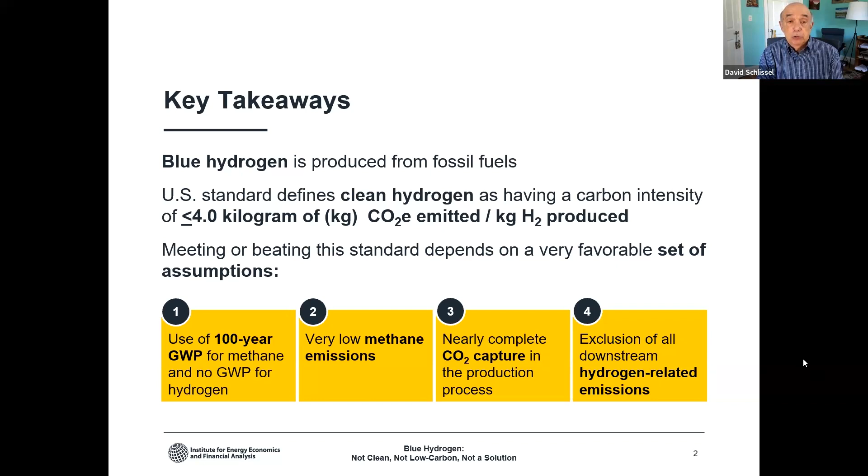With more realistic assumptions, you can see here that the carbon intensity of blue hydrogen will be 3 to 4 times higher than the 4.0 federal clean hydrogen production standard.

Thus, our conclusion is that blue hydrogen is not clean or low carbon and never will be. Next slide, please.

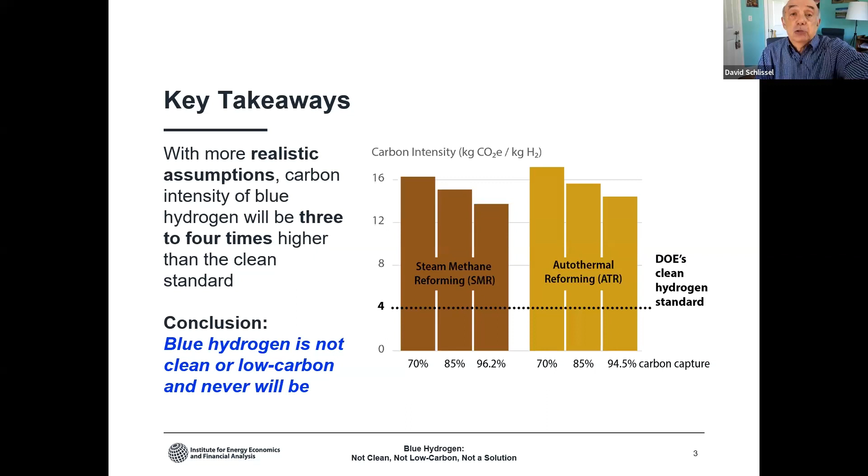Why have we looked at this question? The 2021 bipartisan infrastructure law and the 2022 Inflation Reduction Act have promised billions of dollars, first to establish hydrogen hubs around the nation, second to give production tax credits to both production of hydrogen and to carbon capture and sequestration. We decided it was important to look at whether in fact blue hydrogen is clean, and if it's not, in what circumstances it would not be clean. Next slide, please.

What evidence do blue hydrogen proponents use to prove it would be clean and low carbon? The answer is simple, not much. Mainly, they just repeat the words hydrogen, clean, and/or low carbon together or alone as often as possible, despite lack of evidence, despite whatever questions they're asked. Their response is it's clean, etc.

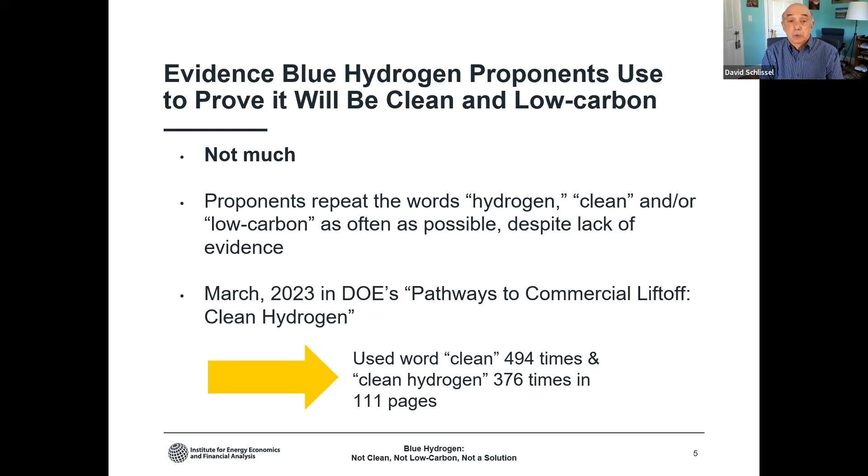For example, the March '23 Department of Energy report, Pathways to Commercial Liftoff: Clean Hydrogen, used the word clean an astounding 494 times in a 111-page document, and used the term clean hydrogen 376 times. To be fair, they did have one chart that showed carbon intensity of blue hydrogen amongst other information about its cost, but they didn't really explain what it meant. Next slide, please.

How have we investigated these claims? We studied the reasonableness of default assumptions built into DOE's GREET model. GREET stands for Greenhouse Gases, Regulated Emissions, and Energy use in Transportation Model. GREET was developed by the DOE's Argonne National Laboratory. It's used all around the world. It was originally designed to examine the emissions associated with clean fuels and has been modified now to look at different pathways to producing hydrogen.

We have no criticisms with the model. We're using it as a tool to evaluate how clean blue hydrogen will be. However, we did find that many of the default assumptions are unrealistic. As a result, we reviewed scientific literature and real-world experience, spoke to some people who designed and work on GREET and others. And finally, we modeled over 100 scenarios in the GREET model to examine when blue hydrogen might be clean and when it would not be. Next slide, please.

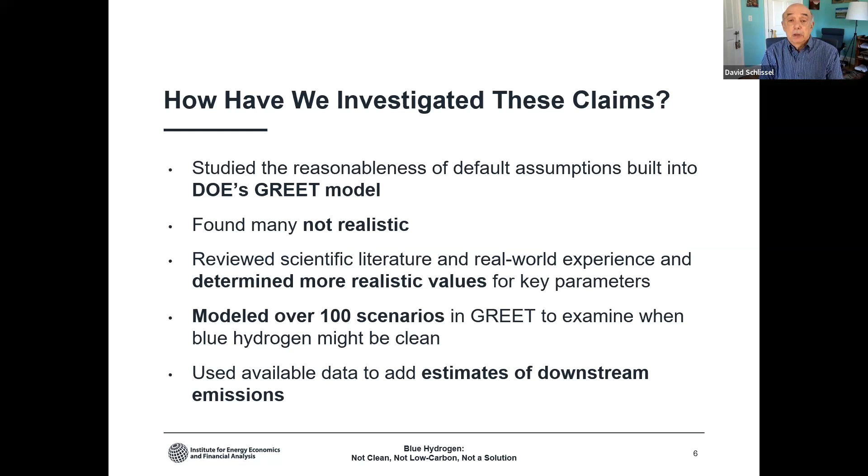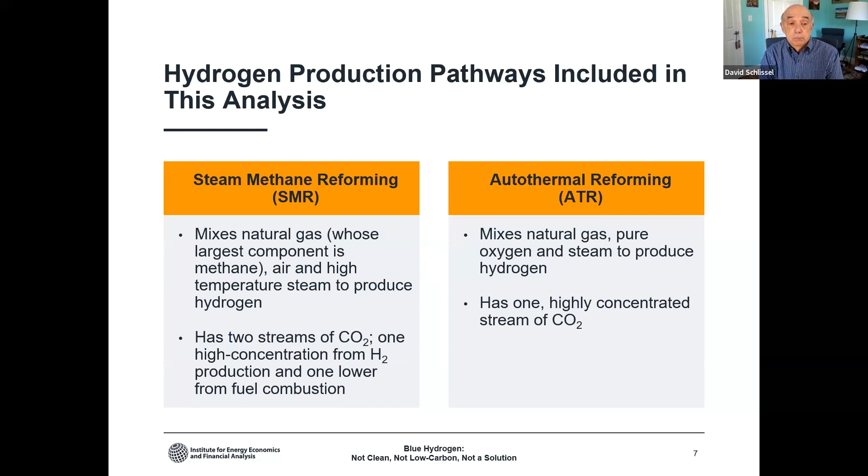We looked at two main production technologies, or as DOE calls it, pathways. The main one used in the world today is steam methane reforming that mixes natural gas, whose largest component is methane, air, and high temperature steam to produce hydrogen. And a newer technology that is expected to be the main one used in the future is autothermal reforming, ATR, which mixes natural gas, pure oxygen, and steam to produce hydrogen. There are a couple of other technologies, but from the literature research we've seen, these probably will be the main ones used in the future. Next slide, please.

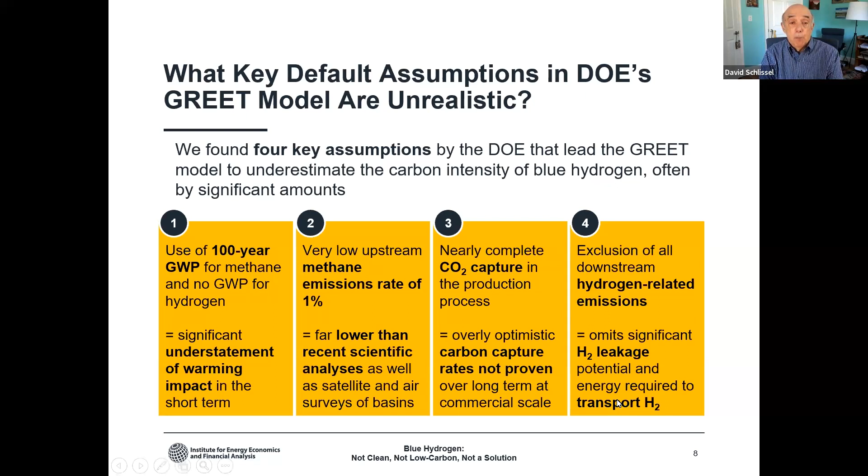As I mentioned earlier, there are 4 key assumptions that we believe lead the GREET model to underestimate the carbon intensity of blue hydrogen, often by significant amounts: global warming potential, methane's emission rate, CO2 capture rate, and whether downstream hydrogen-related emissions are included or not. Next slide, please. The first assumption we'll discuss is global warming potential. Next slide, please.

There are 2 reasons why GWPs matter and why 20-year GWPs matter in particular. As you can see from this chart, methane has a very high 20-year global warming potential of 83 that declines over time to a figure of 30. What the 83 and 30 stand for is times; for example, methane's 20-year global warming potential is 83 times stronger than that of carbon dioxide. Hydrogen has a 20-year global warming potential of 33 times that of carbon dioxide. That declines to 11 after 100 years.

If you only focus on the 100-year global warming potentials, the impacts of methane and hydrogen are significantly smaller, and that leads to an undercounting of their impact on global warming in the short term. Now, using 100-year global warming potentials might have mattered decades ago, when it seemed like the climate crisis was something in the future, decades down the road.

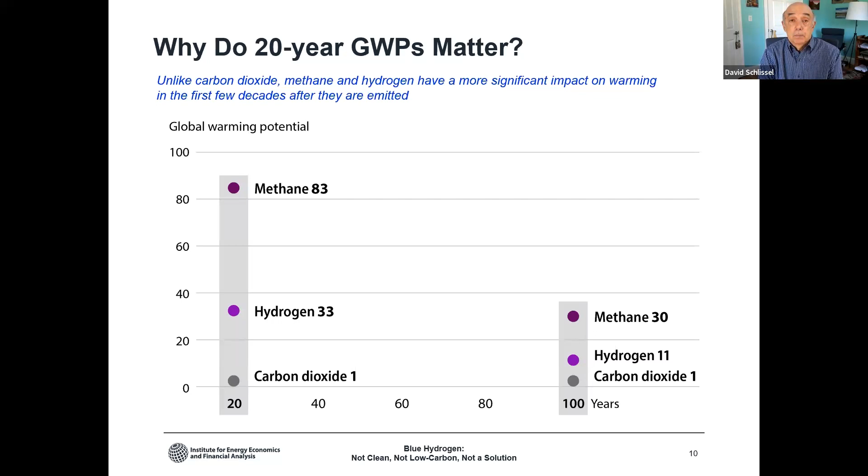The impact of changing the global warming potential from the 100-year default in GREET to 20-year default simply makes the carbon intensity of blue hydrogen higher, whichever of the two main technologies you look at.

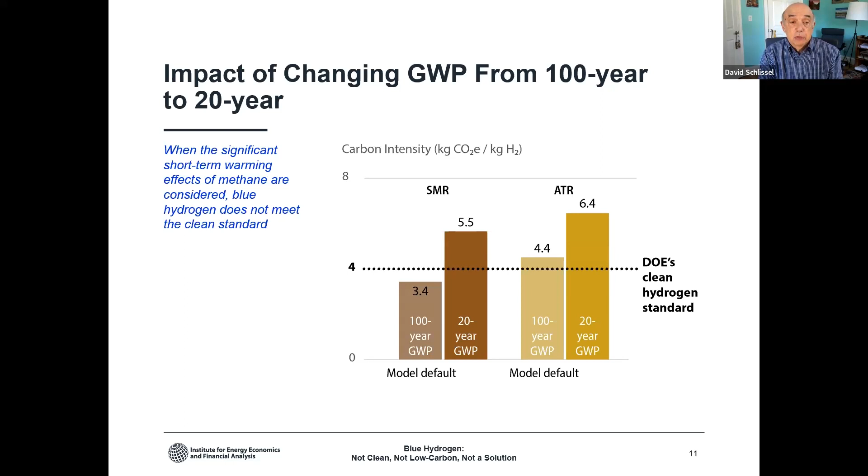Now, this slide shows another important fact, that even with a 100-year global warming potential, facilities using ATR technology would not meet the federal clean hydrogen production standard, because the carbon intensity of 4.4 would be above the federal clean hydrogen production standard. Facilities using SMR technology, steam methane reforming, would meet the standard, but just barely, having a carbon intensity of 3.4. Next slide, please.

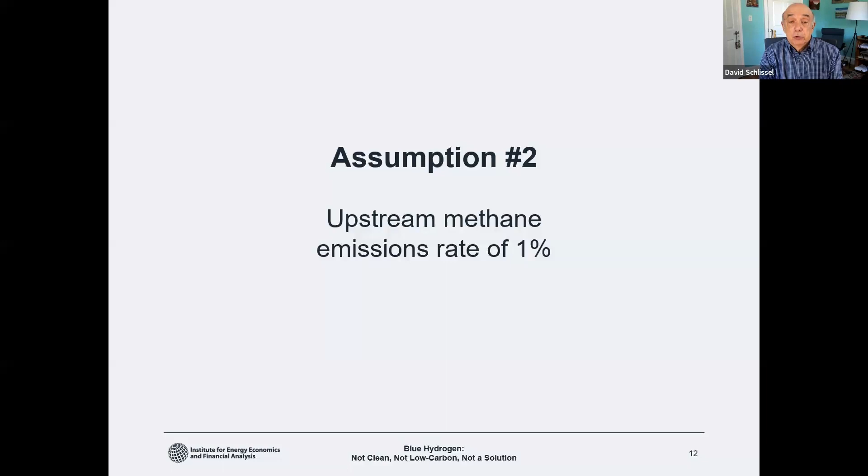The second key assumption that we've looked at is the methane emission rate. GREET assumes a 1% upstream methane emission rate. Upstream means between when the natural gas is produced at a well and it is delivered to the hydrogen production facility. Next slide, please.

Why do upstream methane emissions matter? You can see why in this chart. For the two main technologies, whether you're looking at 100-year global warming potentials or 20-year global warming potentials, the carbon intensity of the hydrogen being produced goes up as the assumed methane emission rate goes up, first from 1% to 2.5%, and then from 2.5% to 4%. Again, it's the same for both technologies. Next slide, please.

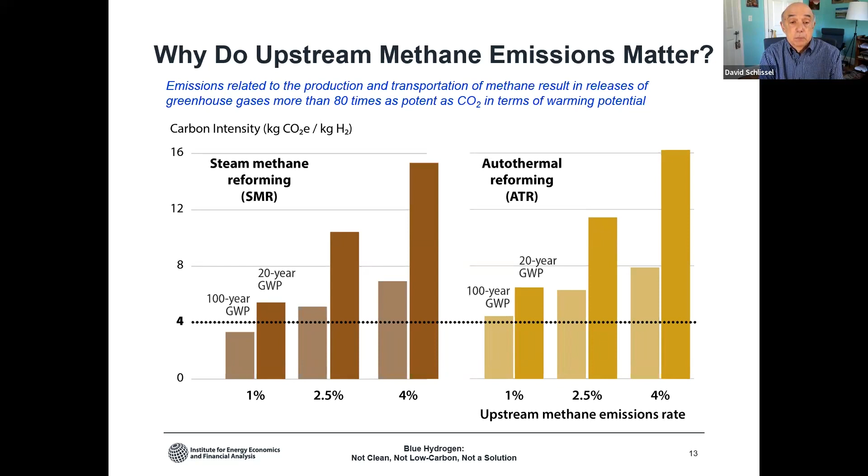What do recent scientific studies say about methane emission rates? They don't say this directly, but it's clear from their results, which are shown in the bars on this chart, that by and large, the results of these 10 recent studies show methane emission rates significantly above 1%. So for the purposes of our analysis, we've looked at a range of methane emissions going from 1% up to 4%, with a midpoint of 2.5%. Next slide, please.

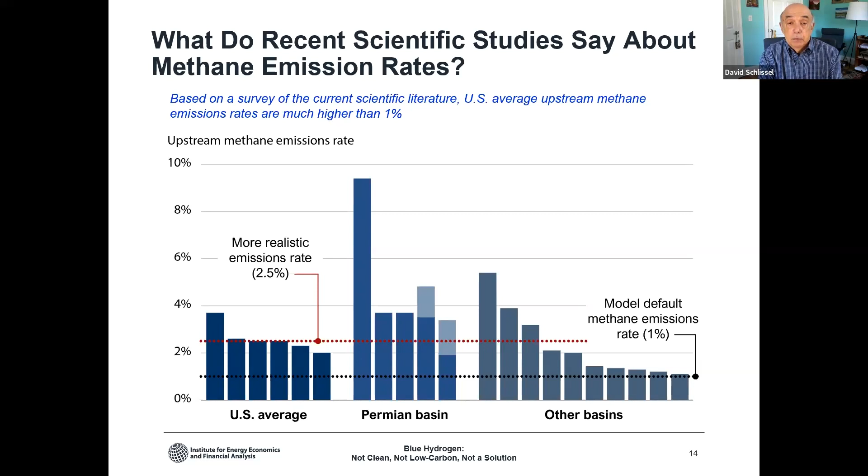Assumption number 3, very high carbon capture rates. Next slide, please. The Department of Energy assumes that facilities using SMR technology will capture 96.2% of the CO2, and that facilities using autothermal reforming will capture 94.5% of the CO2. That's the default built into the GREET model.

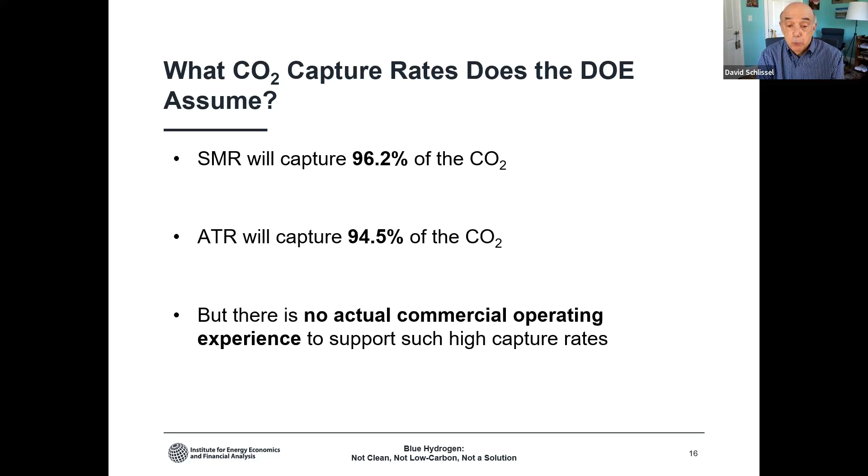Now you can change those percentages, but the results that the DOE talks about use those capture rates. But there's no actual commercial operating experience to support such high capture rates, as we'll see from the next slide.

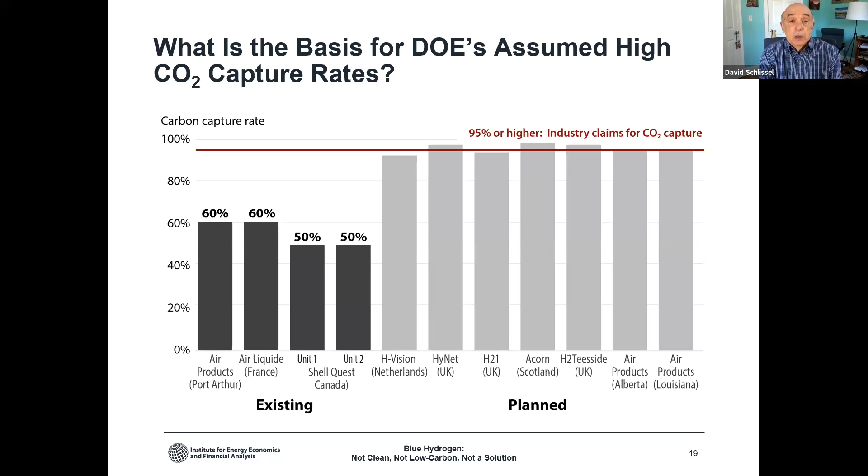Next slide, please. Why is the carbon capture rate important? Simple. The higher the carbon capture rate assumed, the lower the carbon intensity of the hydrogen being produced. Simple as that. Again, you see here that even with the built-in high carbon capture rates in GREET, facilities with ATR technology don't meet the federal standard. And while those with SMR technology do, it's just clean by a small margin. And now I will turn the presentation over to my colleague and co-author, Anika.

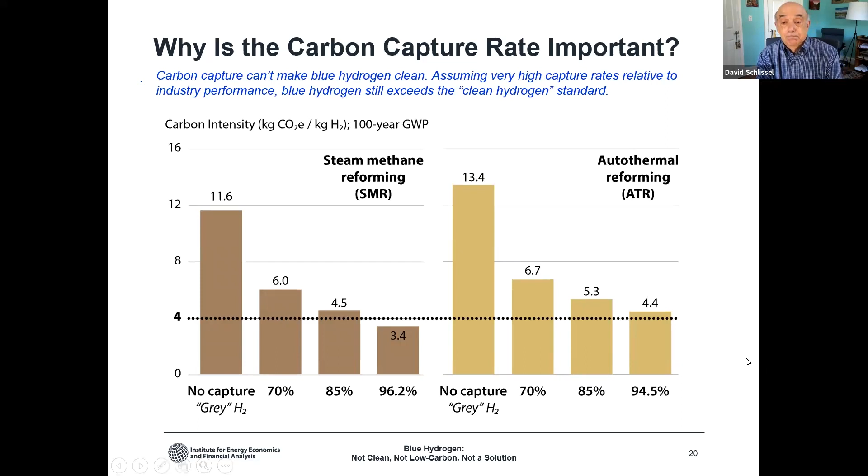Thank you, David. So the fourth key assumption that helps make the carbon intensity of blue hydrogen appear low is that the life cycle analysis doesn't include any of the downstream emissions beyond the back gate of the hydrogen production facility, except for some of those related to the transport, injection, and storage of the CO2 that's captured during the production process. Next.

In order to understand the carbon intensity of different fuels, life cycle analyses are done to estimate emissions from cradle to grave, so that all emissions from the point of raw material extraction to the use of a fuel are encompassed. The use of LCAs makes it possible to compare fuels to one another in terms of their total emissions. But in the case of hydrogen, the DOE and the IRA have mandated a well-to-gate life cycle analysis. And specifically for blue hydrogen, this envelope includes upstream emissions related to the production and delivery of natural gas, as well as emissions related to the electricity generation for hydrogen production and carbon dioxide management.

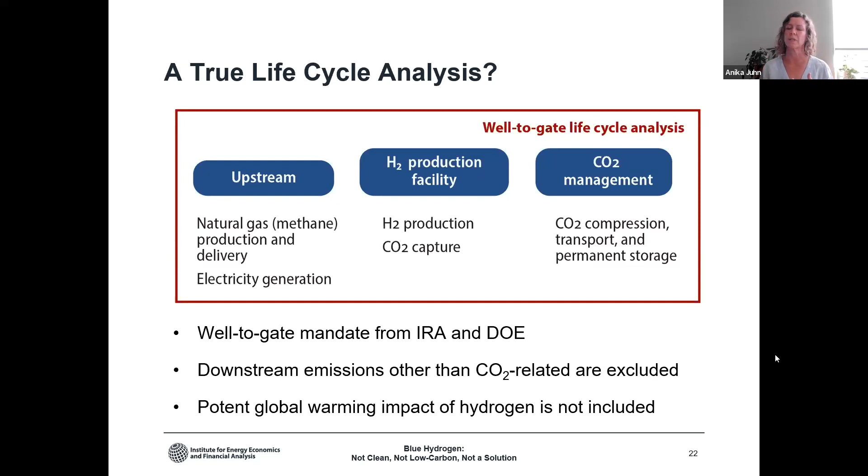But as I mentioned, except for some of the emissions related to the transport and storage of the CO2 captured, the life cycle analysis covers emissions only up to the back gate of the production facility, the point at which gaseous hydrogen exists, but at a low pressure. As a result, the downstream emissions related to hydrogen are not included. Next.

Hydrogen is an indirect greenhouse gas that contributes to global warming by affecting how quickly methane is broken down or removed from the atmosphere. Current studies indicate it has a 20-year GWP that's 33 times that of CO2. And we know this tiny molecule will be difficult to control throughout the processes of transport, distribution, and storage, and we know that leaks will occur. The leaks will be difficult to detect if they're below a safety threshold, and the technology needed to detect such leaks is just being developed.

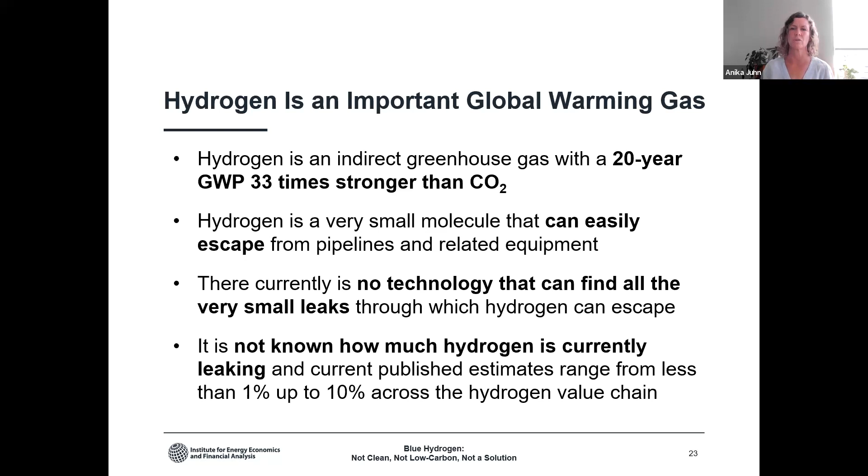Current scientific papers indicate that leakage could be as high as 10% across the hydrogen value chain. And so with the White House anticipating 10 million metric tons of hydrogen being produced by 2030 in the US alone, hydrogen leakage could become a very significant contributor to global warming. Next slide.

Excluding the downstream emissions related to hydrogen from the total carbon intensity estimates obscures how dirty blue hydrogen would be. But just because Congress and the DOE do not mandate the inclusion of those emissions in the LCA, it doesn't mean that they don't exist, and it doesn't mean that they're insignificant either. Next.

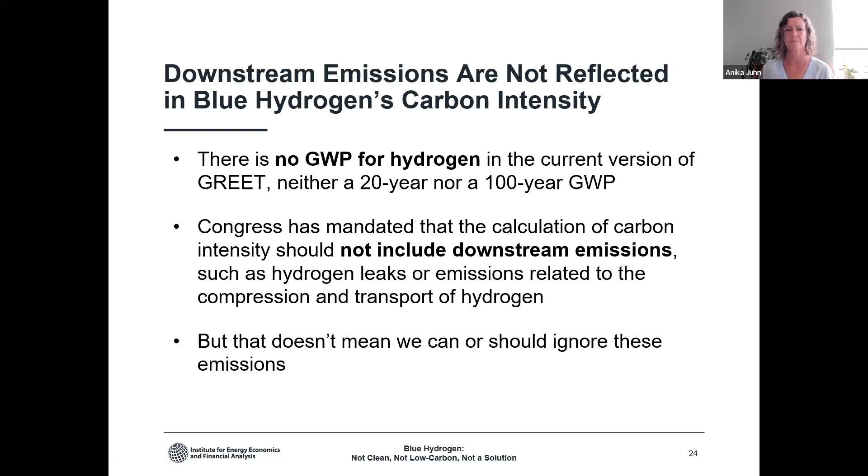The more realistic assumptions we made in this study are based on available performance and leakage data, and we considered 20 and 100-year global warming potentials, a range of emissions, the methane emissions from 1%, which is the GREET default, up to 4%, with a midpoint of 2.5%.

We looked at several carbon capture rates. We looked at those maximum GREET values of 96.2% for SMR and 94.5% for ATR, as well as 85% and 70%. We also looked at downstream emissions that include an estimate of 5% hydrogen leakage and emissions from the electricity required to compress the hydrogen enough to make it ready to transport as a gas. We didn't include electricity needed to liquefy the hydrogen or to reboost its pressure if it was transported over long distances.

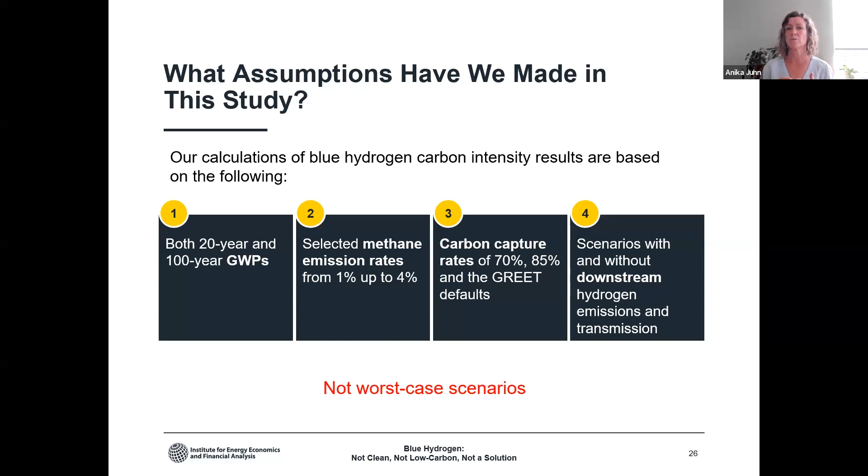We used the GREET model, the DOE GREET model, to estimate the well-to-gate carbon intensity of the blue hydrogen and then added on the estimate of those selected downstream emissions. Again, as we've mentioned, these are not worst-case scenarios. We assumed higher carbon capture rates than any commercial-scale hydrogen production facility has realized, and the methane emission rates reflect a national average, but some areas, such as the Permian Basin, have leaks measured at more than 9%. And we've also just included a portion of the downstream emissions.

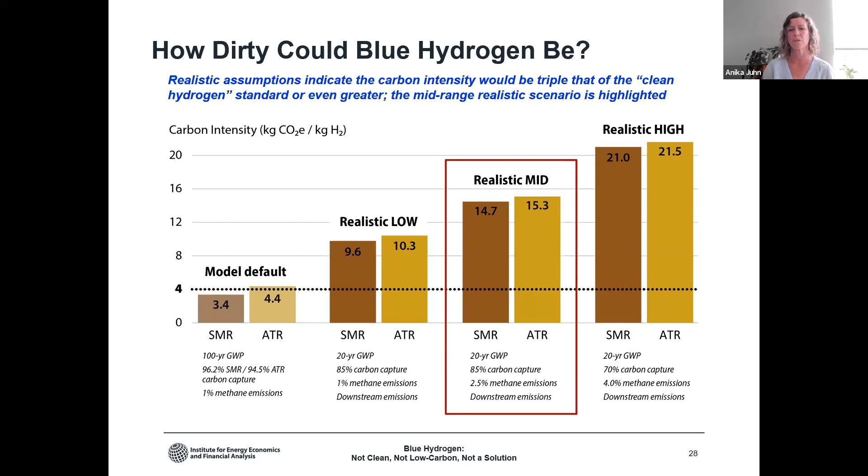Now I'll turn it back to David to highlight our conclusions. Next slide.

We have 4 conclusions. Contrary to the claims of blue hydrogen proponents, the fuel is not clean or low carbon, and it never will be. Second, unless you accept all of the unrealistic default assumptions built into the DOE GREET model, producing blue hydrogen from natural gas is shown to have carbon intensities potentially as high as 5 times the DOE's clean standard.

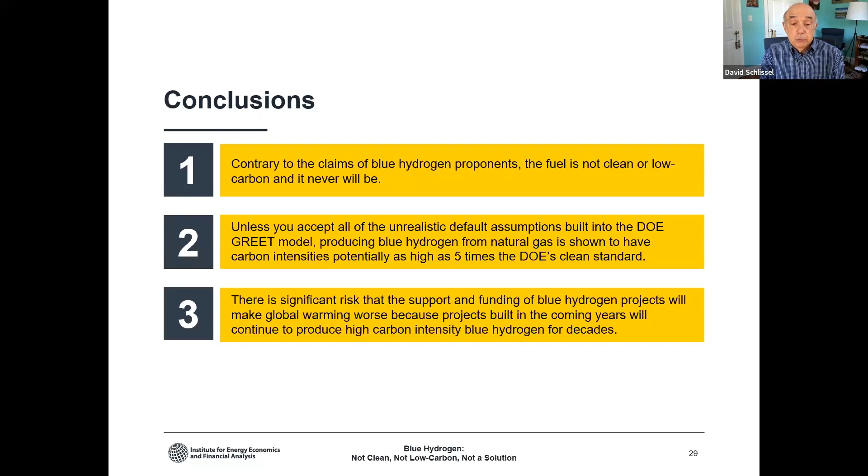Third, there is a significant risk that the support and funding of blue hydrogen projects will make global warming worse because projects built in the coming years will continue to produce high carbon intensity blue hydrogen for decades. And lastly, neither the US federal government nor state governments should be funding dirty blue hydrogen production projects. And we're ready for questions.

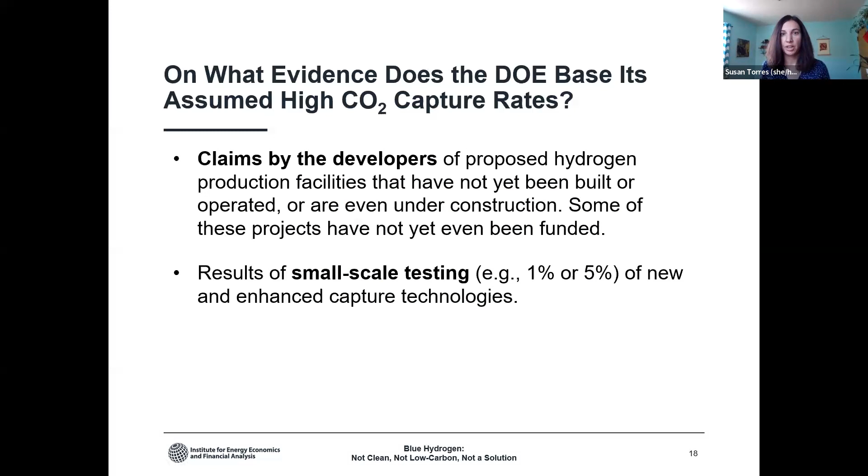Great, thank you. And we'll go to our first audience question. I'll go back really quickly, I believe it was this slide. So from Woody Hastings, in regards to slide 17, which I've pulled up here: for all this captured carbon, what is being done with it? How is it being stored or repurposed? If stored, how can we have confidence that there is no leakage over time?

Good question. 75% of the CO2 that has been captured to date has been used for enhanced oil recovery, in which it has been injected back into the ground to produce oil that would otherwise not have been either economically or technically feasible to produce. When that oil is either used as a feedstock for petrochemicals or is burned, carbon dioxide is released.

Depending on your assumptions, part of the CO2 that's captured is offset by the additional CO2 emissions from the burning or use of the oil produced through EOR. Now, again, depending on your assumptions, either part or all of the CO2 that's captured is offset. So there are many who believe that more CO2 is emitted through EOR than is captured at a power plant or production facility.

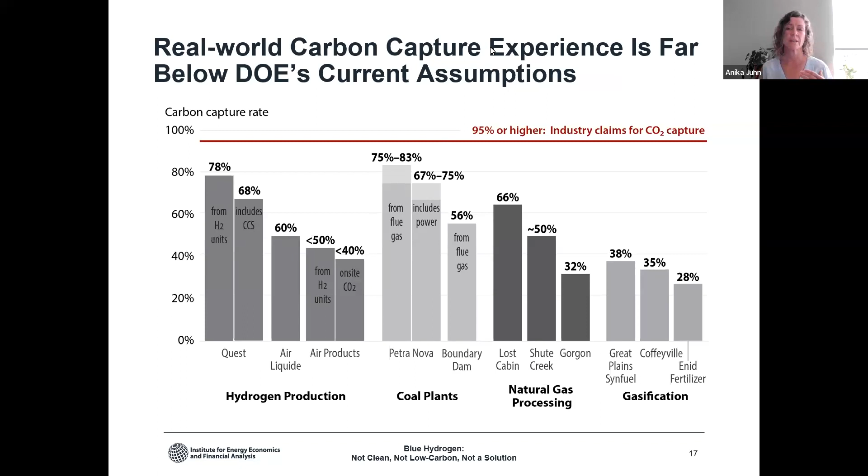So at a 100-year GWP basis, for every 1% increase in upstream emissions rates, there's a 0.9 kilogram CO2e per kilogram hydrogen increase in the carbon intensity. But when you're looking at that on a 20-year GWP basis, it jumps to 2.5 kilogram CO2e per kilogram hydrogen. So that's a huge driver, and it's really difficult to control those upstream emissions: fugitive emissions, detecting emissions along long stretches of pipeline, et cetera. So managing that methane before it even gets to the production facility is really important.

Great, thank you, Anika. Next question.

Several countries, including Indonesia, are currently studying the blue hydrogen option to transit from coal. In terms of investment and resources poured in for this option, what would you say to them? What alternatives would you suggest for the energy transition?

The answer is at least simple to me. Renewables, battery storage, energy efficiency have been proven. Are we going to be able to do that overnight? No, nobody's expecting this energy transition to happen overnight. But spending money on those alternatives is better than spending money on blue hydrogen, which will make the situation worse.

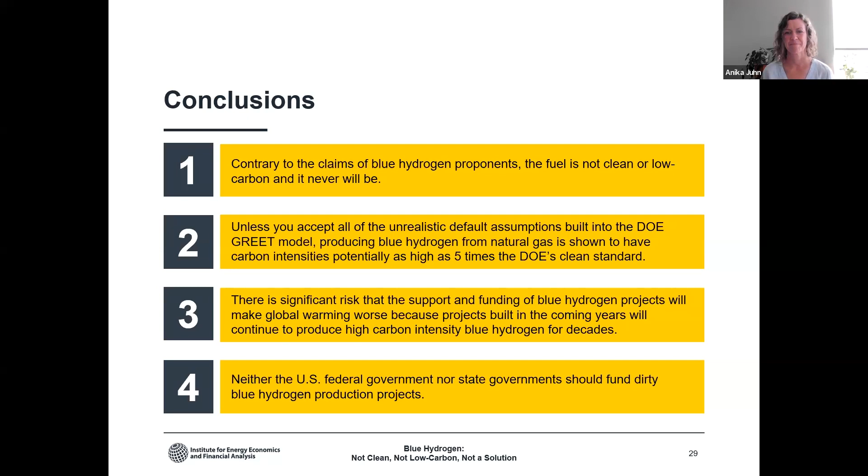Water has been absent from a great deal of the discussion around hydrogen of any color. Is there enough water to support the production of hydrogen from nuclear or renewables? I'm very skeptical, to be honest, especially after doing our report and looking at news reports about droughts around the nation, let alone in areas of the world that don't have even the water resources of drought areas in the US.

But we have not studied that in detail yet. We hope to in the future. Great, thank you. Next question.

How do frontline community groups defend against this hydrogen hype and communicate with the DOE about concerns over hydrogen hub designations? I don't know the answer to that. I'll be brutally honest, which is what you expect of someone or should expect of someone in a webinar. I don't think the DOE wants to hear from the people. I think they've made it pretty clear they don't want input from the people.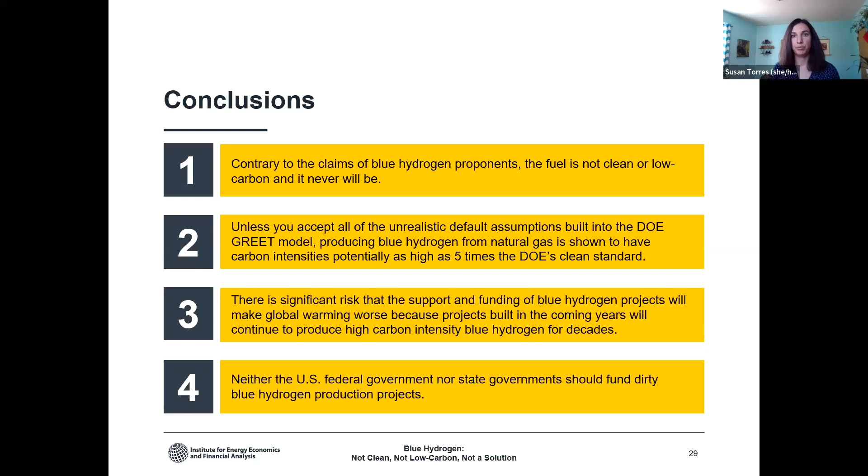So next question we will tackle is the NOAA reports on atmospheric methane concentrations show it rising rapidly since the fracking boom began to over 1900 ppb. Does that tell us anything about the true methane leakage rates? 1%, 2.5%, 4%, 95%. Well, we've relied on the scientific studies that have looked at the emission rates.

Most recently from airplanes and satellites. And those rates appear to be in the ballpark, plus or minus, of 2.5%. That's why we've chosen that as the midpoint of our analysis. Now, is it possible they could get better over time? I sure hope so. But even if they do, blue hydrogen's still a bad idea, as our analysis shows.

Great, I think we can do one more. There's a clarifying question. So you stated when you first started talking about GREET that you have no problem with the model, but then we talk about several unrealistic assumptions in the model. So don't unrealistic assumptions amount to a flawed model? You want me to take that one? Sure. Okay. It's a good clarifying question.